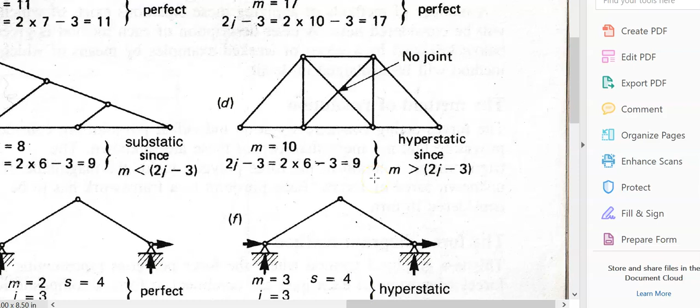Alright, so I'll leave it up to you. Don't just assume it. Work through it. Remember what I said in the note earlier in the introduction? Work through everything I give you. Don't just say, oh yes I know. Work through everything I give you.

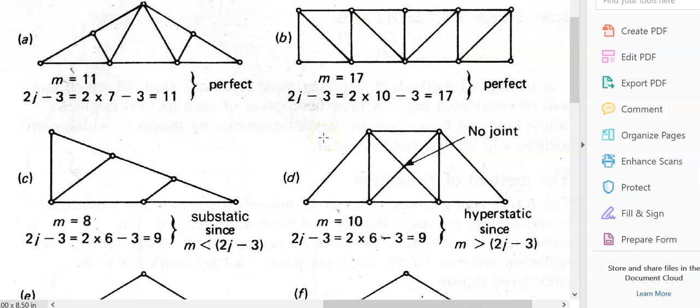Right people, now notice these 4 frames here. We just looked at the frames themselves, and of course the frames are attached to supports. So we're going to look at frames that are sitting on supports. And because it's being supported, we need to take those support reactions into account.

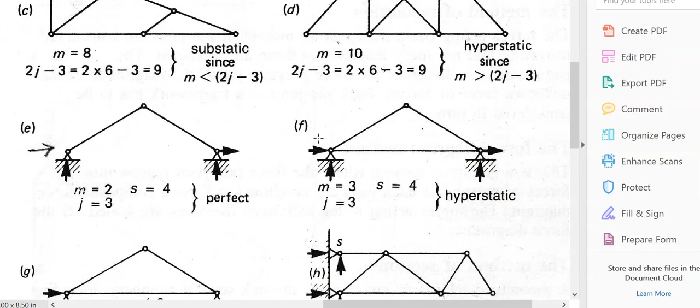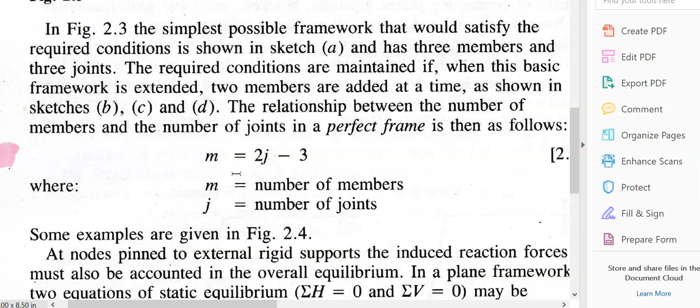And when we do that with frames sitting on supports, the formula to use there will be M plus S equal to 2J. So for the frame without supports, the equation to use to check static determinacy is M is equal to 2J minus 3. If we have a frame sitting on reactions, the formula to use is M plus S is equal to 2J.

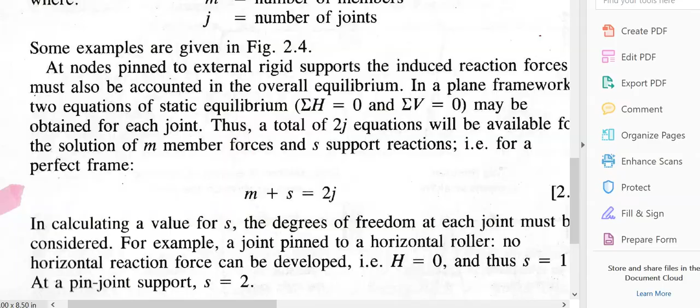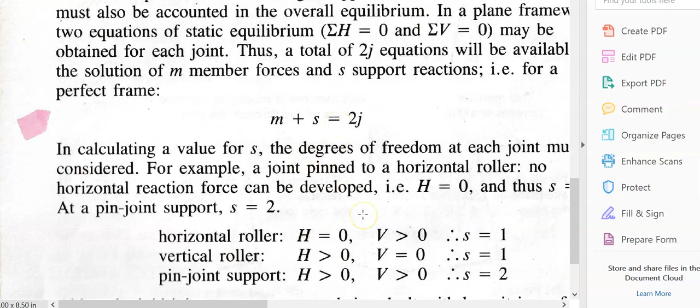Right people, I'm taking this frame here and I'm going to apply this formula here to check whether it's statically determinate or not. Right, there's the formula, M plus S equal to 2J. So what's M? M is the number of members. M is equal to 1, 2, so it's equal to 2. What's S? S is equal to the number of reactions.

Now people, in the text I gave you, there was an error here. Remember, if you cast your mind back to types of joints, a roller joint has 1 possible reaction, a pin joint has 2 possible reactions, and a built-in or fixed joint has 3 possible reactions. In this text that I took it from, the author forgot to put in this reaction here. So S is the number of possible reactions. So if there's a pin, we're going to have 1, 2, 3, 4 reactions.

And J is the number of joints, so we have 1, 2, 3. So what's 2 times 3? 6. And M plus S is equal to 4 plus 2, which is 6. So therefore this side is equal to that side. So therefore this here is a perfect frame, so this frame is statically determinate.

So that's how we use this formula when we have a frame sitting with reactions. That's the formula we use, and we're using it to check if this frame is statically determinate. And from that, because the left side is equal to the right side, it's a perfect frame.

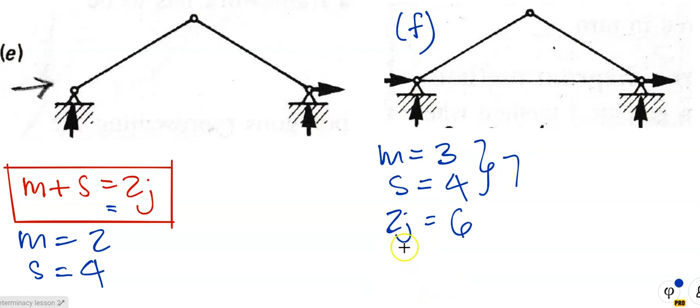So M, number of members, 1, 2, 3. S is the number of reactions; because we've got 2 pin joints, we've got 2 possible reactions for each one, so it's 1, 2, 3, 4. Number of joints is 1, 2, 3, so therefore 2J is equal to 2 times 3, which is 6. So M plus S is equal to 7, and 2J is 6. So therefore, M plus S is greater than 2J.

What does it mean? If that's greater, that means this frame is hyperstatic. It contains 1 or 2 members which we can remove, and when we take it away, it will still make the frame stable. If I remove this member here, it's gonna look exactly like this one. And then this hyperstatic frame will now become a perfect frame. So once again, if you have a frame sitting on supports with reactions, that's the formula we use to test for static determinacy.

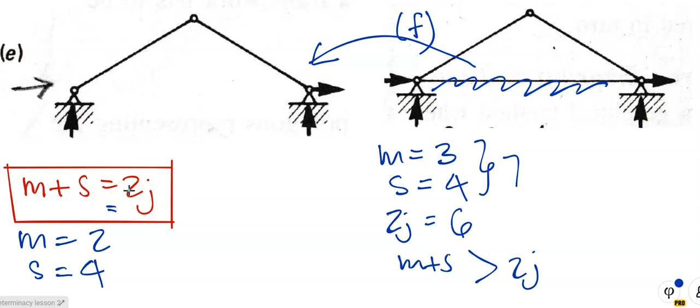If I go back to the document I gave you, the previous one, you can work it yourself. M is equal to 1, 2, 3. S is equal to 1, 2. Notice there we've got a roller joint, and a roller joint has 1 possible reaction. So therefore, S is equal to 1, 2, 3. M plus S is equal to 6, and 2J is equal to 2 times 3, 6. So M plus S is equal to 2J. Therefore, this frame is a perfect frame.

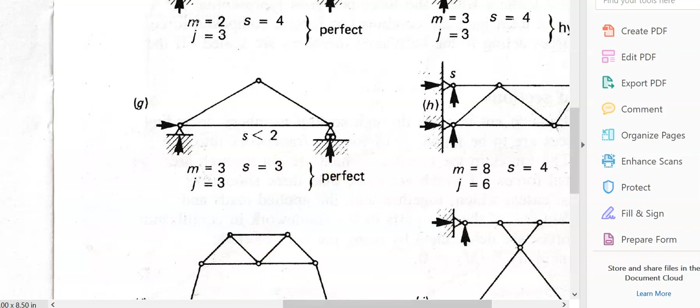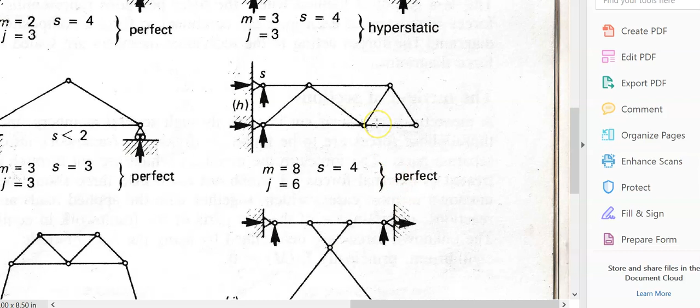Let's have a look at the next one. I'll work it quickly there. Number of members is 1, 2, 3, 4, 5, 6, 7, 8. That's why it's 8. Number of reactions: we have 2 pin joints, 2 each, that's how we get 4. And 2J, how many joints? 1, 2, 3, 4, 5, 6. 2 times J is 12. 8 plus 4 is 12. Therefore, this frame is a perfect frame. So that's how we test, and they're both statically determinate.

This next one you can do yourself. I'll do this one quickly here. Number of members is 1, 2, 3, 4, 5, 6, 7, 8, 9. We get 9. Because we've got two pin joints, we've got 2 possible reactions per joint, that's why that's 4. And 2J, how many joints? 1, 2, 3, 4, 5, 6, 7. 2 times 7 is 14. So M plus S is 13 and 2J is 14.

So that means the left hand side, can I write it there? I don't think so. So M plus S is less than 2J. So therefore this frame is substatic. So this frame is potentially unstable under load.

Right, do the same with this one here. Count the number of members, count the number of reactions. Notice there's 4 pin joints, so we've got 8 reactions. Count the number of joints, check your equation for M plus S equal to 2J and see if you get that it is actually hyperstatic. Check that. Right, people, work through all of that. That's the next lesson on static determinacy.

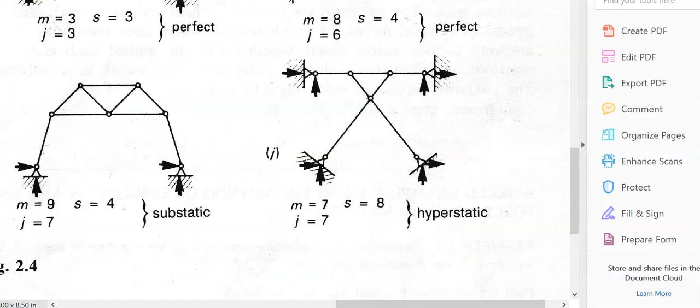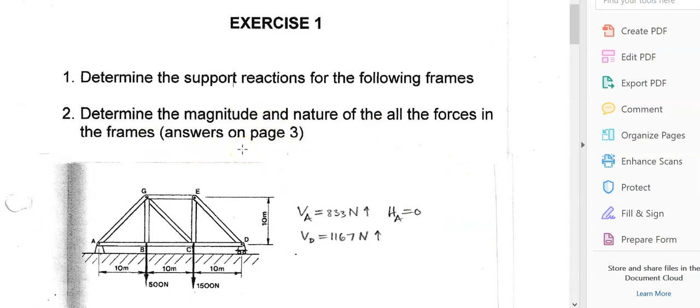Now, if I open the first one, frames 1, there it is over there. Yippee! Does it look familiar? Yes, it does look familiar. If you've worked through everything I asked you in Applied Mechanics, you would have worked through this. There's the question: determine the support reactions, determine the size of the force, and whether the force is in tension or compression using the method of joints. But what we're going to do, we're going to check whether this frame is statically determinate. That means we're going to check whether it's a perfect frame, whether it's hyperstatic or substatic.

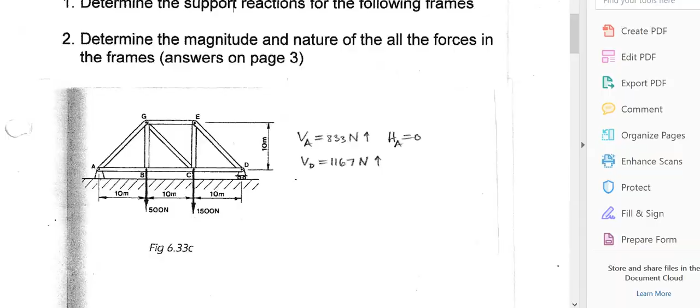Right, people, I brought that frame in there, which is the first one from the document frames 1, which I'm going to upload to Blackboard very soon. The question is determine whether that frame is statically determinate. And because it is sitting on supports there, which formula are we going to use? We're going to use that one over there. So what we do, we first count the number of members. So I'm doing it over here. Let me just do this quickly.

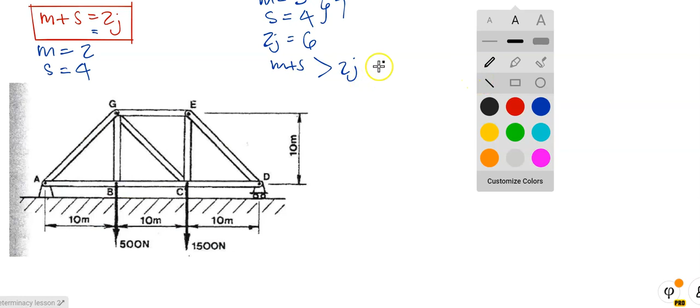Right. So M is equal to 1, 2, 3, 4, 5, 6, 7, 8, 9. Now remember, even though we don't show it here, every one of these joints is a pin joint. And then S is the number of reactions. There we have a pin joint, so the pin joint has 2 possible reactions. I'm just going to throw it in like so. We're not concerned with the size of the reactions, we're not concerned whether it's up or down, but we know there are 2 possible reactions. And we have a roller. It's got 1 possible reaction, and it's in the vertical plane because it's free to move this way. So S is equal to 3.

2J. What's J? Number of joints. 1, 2, 3, 4, 5, 6. So 2 times 6 is 12. So M plus S is equal to 12. So therefore M plus S is in fact equal to 2J. So what does it mean? It means our frame is perfect. And that means this frame is statically determinate. And because it is statically determinate, we can go ahead and solve the frame like we've actually done already in Applied Mechanics. So people, that is how we solve that one there.

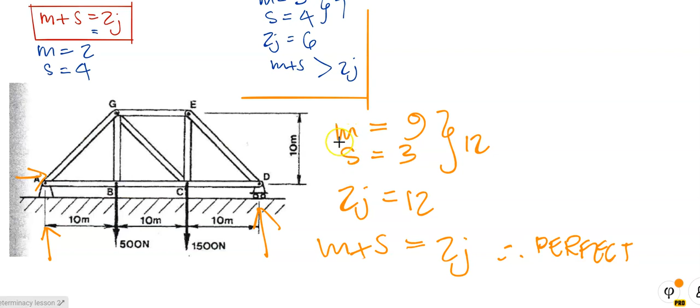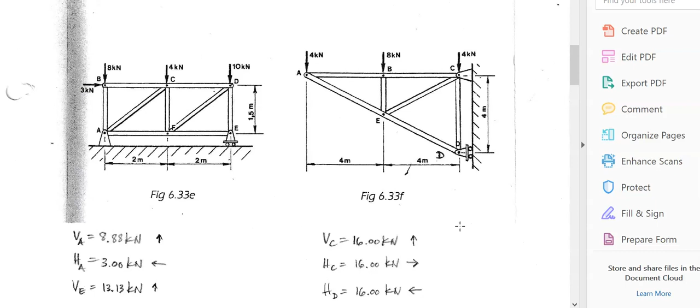So what you do, you go to the next frame and you apply the M plus S equal to 2J formula to this one and to that one, to see whether it's perfect, whether it's statically determinate or statically indeterminate. Right, people, so you do that to those frames there. And also if I just go to frames 3. Remember, if you did all your work that I asked you to, you would have solved those frames too. So you need to go to those 2 frames and check whether those 2 are also statically determinate. I'm going to put that in Blackboard as well. And I'm going to put frames 4 on there also.

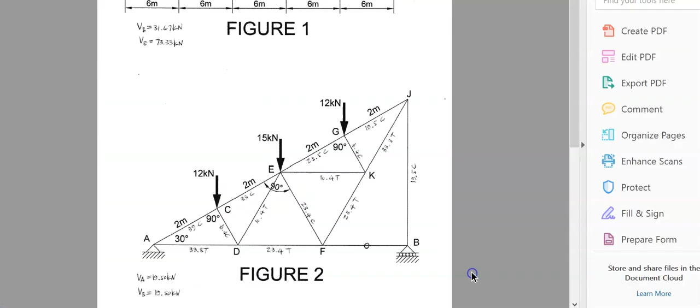You need to check, is it familiar? Yes, it is. It's familiar because you had to do it in Applied Mechanics. You need to apply this formula and check whether that frame and that frame are also statically determinate using the formula there. People, that ends the lessons on static determinacy. So by the end of this week, you should have worked through all of these exercises and answered those questions.